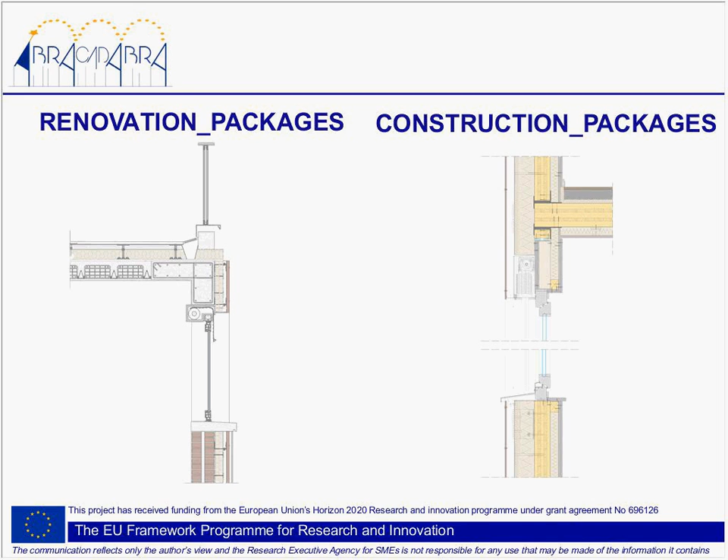We estimated the cost for our tools, the possible renovation on the existing building that you see here on the left, and the possible construction packages as well for the new buildings. So we estimated cost for both categories. This was done in order to achieve a normalized cost per square meter and make it run in our toolkit. This part will be illustrated later on for the case of Archer, Reggio Emilia, and other cases.

Here we see the main stakeholders of the project. In the center we have the direct stakeholders represented by private owners, landlords, construction companies, and architects. We have, less involved but still very much part of the process, public bodies, ESCO companies, the financial sector, and the research building sector, which is maybe the most indirect stakeholder in this frame, but we consider it a super partes that gives the right and fair opportunity to public sectors, ESCO or construction company investors.

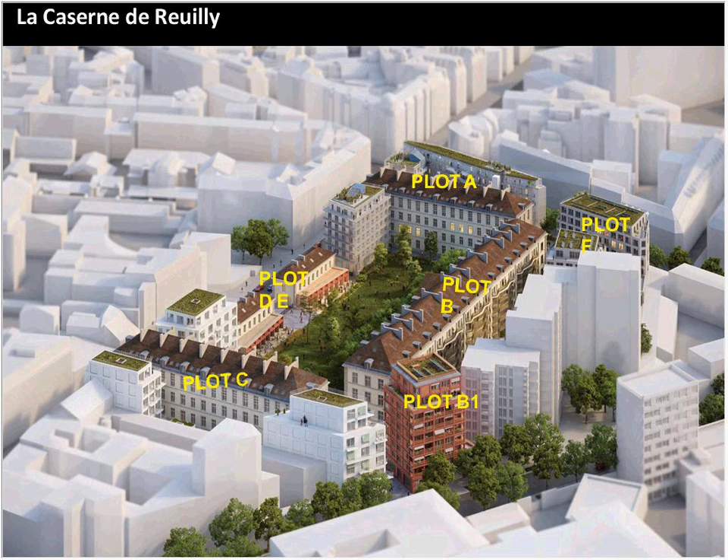Do you hear me? Can you pass the next slide? Yes, thank you. So it's just very briefly an idea of the map of what has been done, but we're going to the next slide as well, because we're going to discuss an extension project in Paris. So please, can you put the next slide?

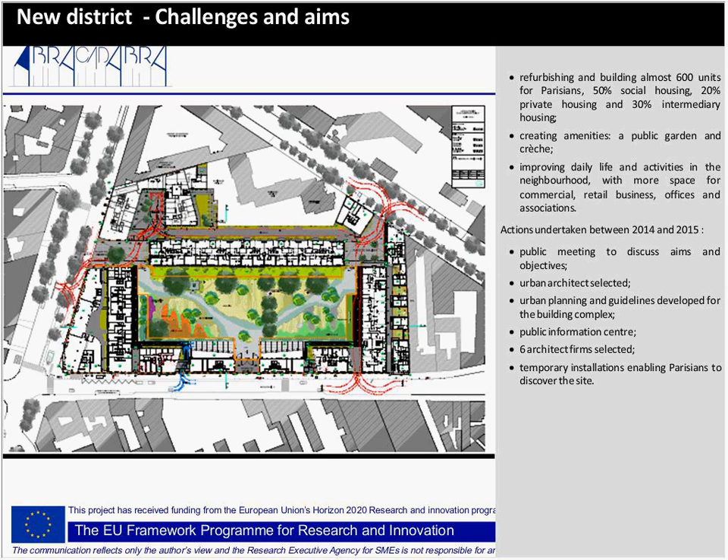You see on the side of the screen the different extensions. So indeed, you see typically the old buildings, and in between the new buildings that will be added. That's a specific form of add-on where we do side extensions, while preserving the architectural heritage.

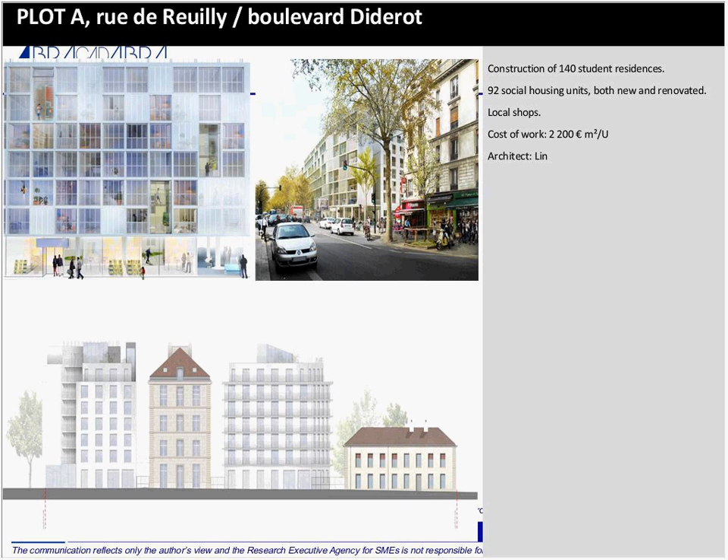That's interesting, but look at the position of the new buildings. On the right side is the older building, in the middle the new buildings, and in the background the typical Parisian buildings. In the middle a garden has been created, which gives the idea that when there's a building extension, it's not only about energy efficiency, and sometimes that's not even the primary factor, but it's an addition to that.

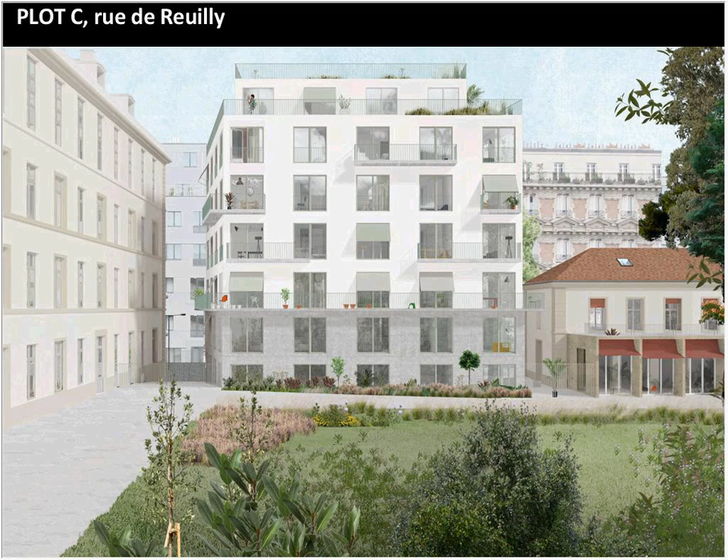Now we're going to see a project where it's really about extension, let's say on top. In Paris they call it using the land in the sky - building in densely populated areas where land is expensive. There's a necessity in Paris, and in other big cities in Europe, to find cheap land, and the cheapest land is the sky, in a way. So they call it using land in the sky, or sky as land.

You see here some examples, and the next slide will go into more detail.

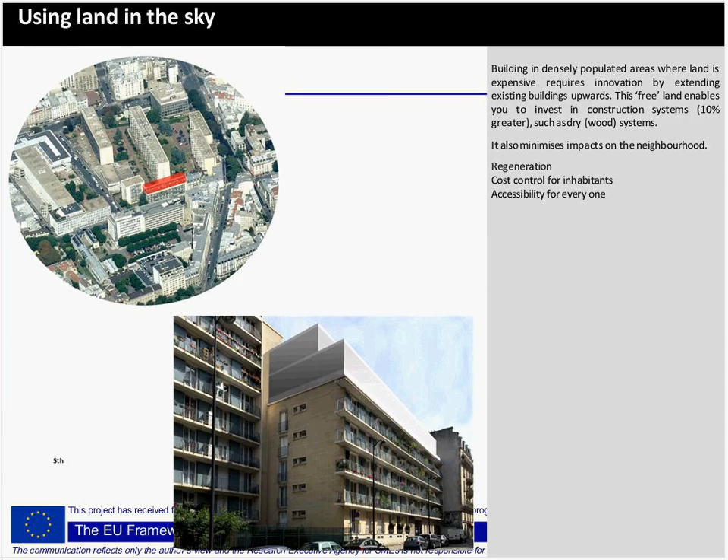This is an example in Paris where they decided to refurbish an existing building and add units on top of it. You can clearly see that in the first picture at the top. This is an overall development where they will renovate existing buildings, creating 72 new units, new elevators, and a whole refurbishment.

The overall energy consumption of the building will go from label E to label B, so this is a strong improvement. The total cost of renovation is about 34 million euros, and most of the extension cost is 18 million euros.

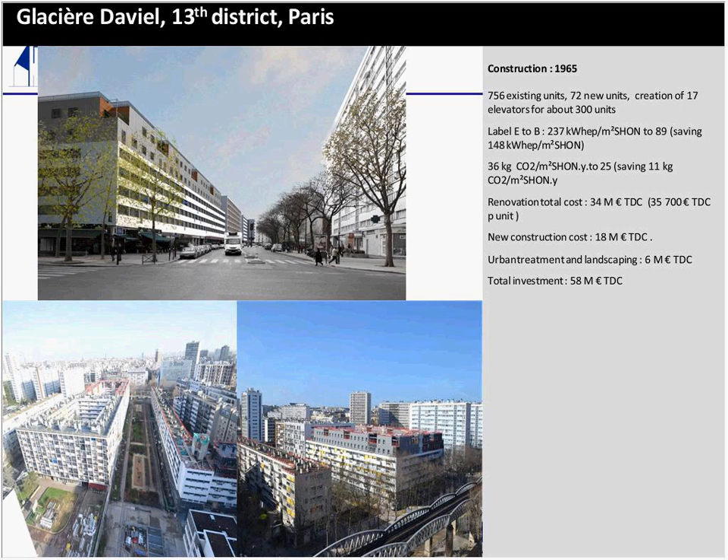Now, the big question we ask each time through Abracadabra is whether or not the building extension is a way to help finance the renovation. As we're going to see in the next slide, it's a big question mark - not easy to answer straightforwardly. So here are some more pictures.

The question is: could we finance the thermal measures for existing buildings without assistance, but with cross-subsidization of higher rent for the new buildings or sale of the new buildings? Another question is: if yes, can we at least preserve affordable rents in the new dwellings, or are rents at market conditions economically necessary?

It means that when housing providers decide to do an extension of the building, will they be obliged, in a way forced, to rent their new dwellings at a level close to the market rent?

Another question is: can extensions modify the business model of renovation in general in the long term? Are urban legislation stumbling blocks for the widespread use of building extensions? Indeed, we heard from Spiridon that it might be a big obstacle. And can residents be involved in the design and implementation of building extensions?

How can resistance be dealt with? We must be careful not to underestimate the fact that people are not always happy about having a building extension, so there's a lot of work to do on that.

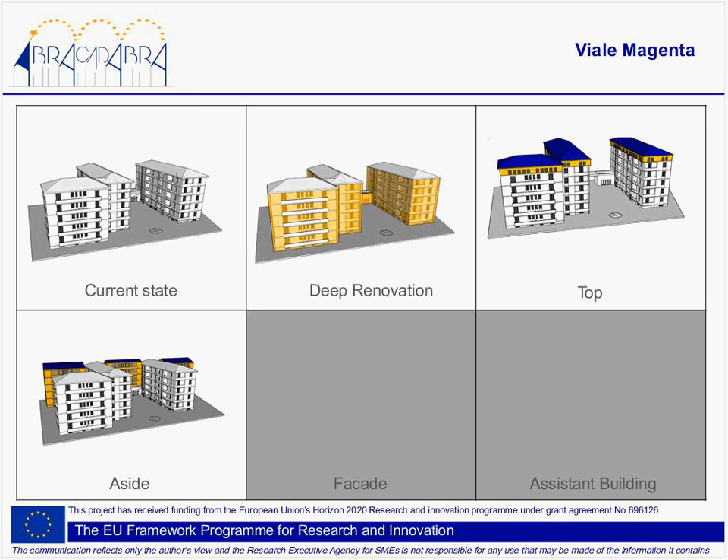The property regime is mixed; there are both owners and tenants from ACER of Reggio Emilia. The first study was a feasibility study of different add-ons. You can see in this case it was not possible to add a facade addition or an assistant building. This relates to the energy consumption before and after the deep renovation intervention: current state consumption in the heating season, and the energy consumption after the deep renovation. We can see there is a reduction of 40%.

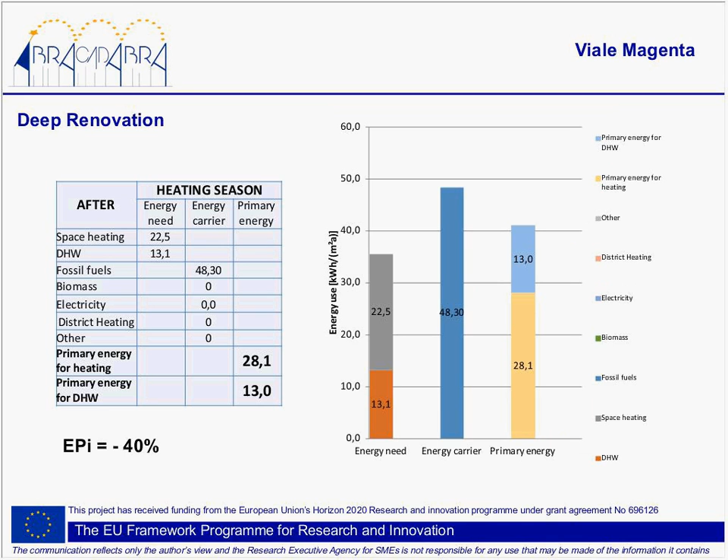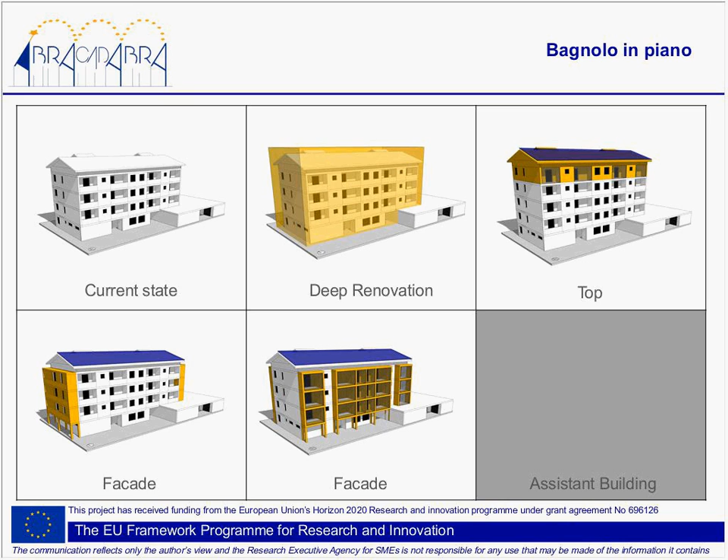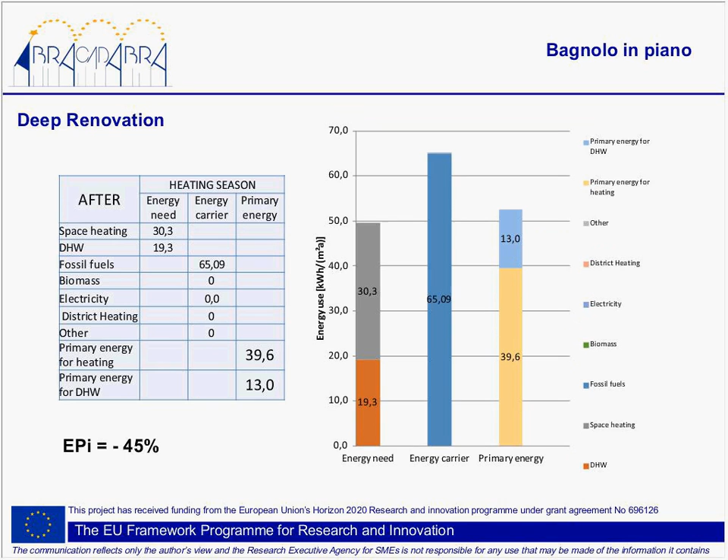Again, consumption analysis was the first step. These are the consumptions of state. And with renovation, we have a reduction of 45% of the energy, of the primary energy index.

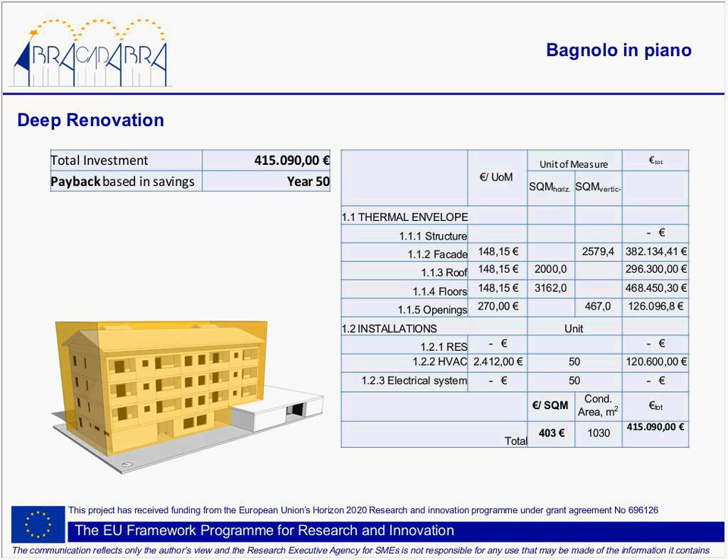Result brings to consider a combined scenario: addition on top plus addition on facade, with the most profitable and plausible option, which is units on top addition, including the renting of the renovated ones.